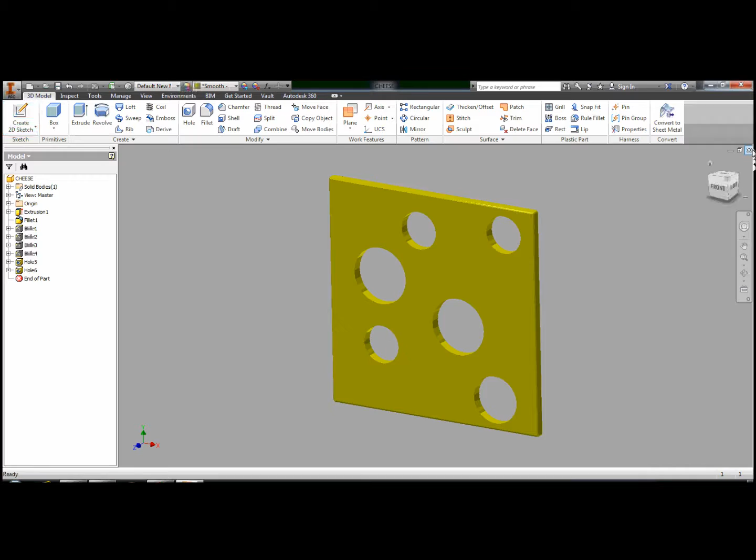So now we're going to go to New, English, Standard IPT like we discussed before, and just hit Create from there. Then, as always, you create a new 2D sketch in the XY plane.

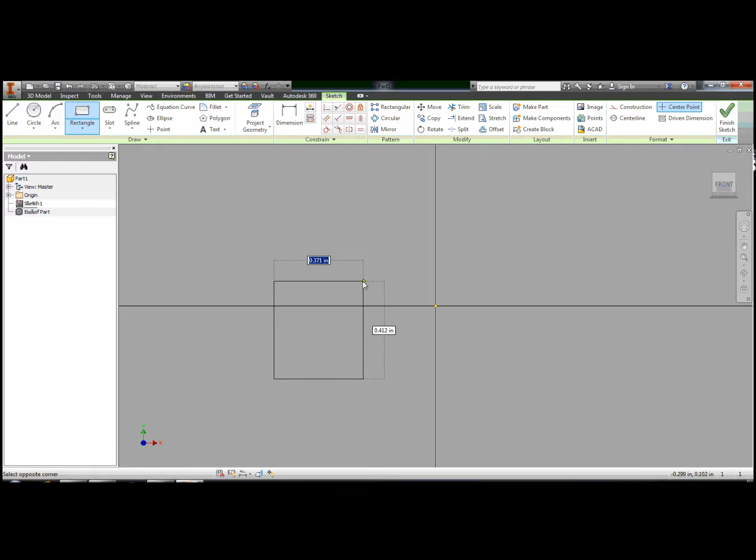Now rather than a circle, we'll make a rectangle, and we'll give it specific dimensions of 12 by 12 inches, because once again this is a huge hamburger. That's a lot of cheese.

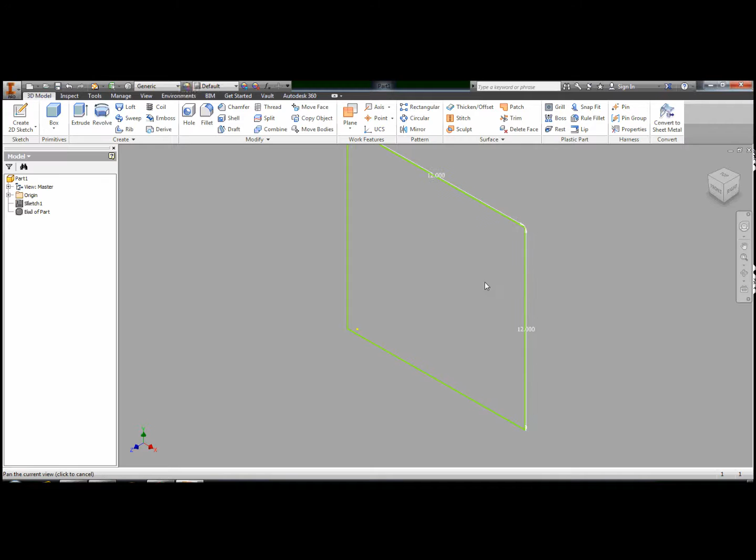As you can see from that rectangle, you can just kind of rotate it, and there you go. We have this finished sketch, and now you're just going to extrude it out 1 inch. You can go any direction with the extrusion, it doesn't really matter.

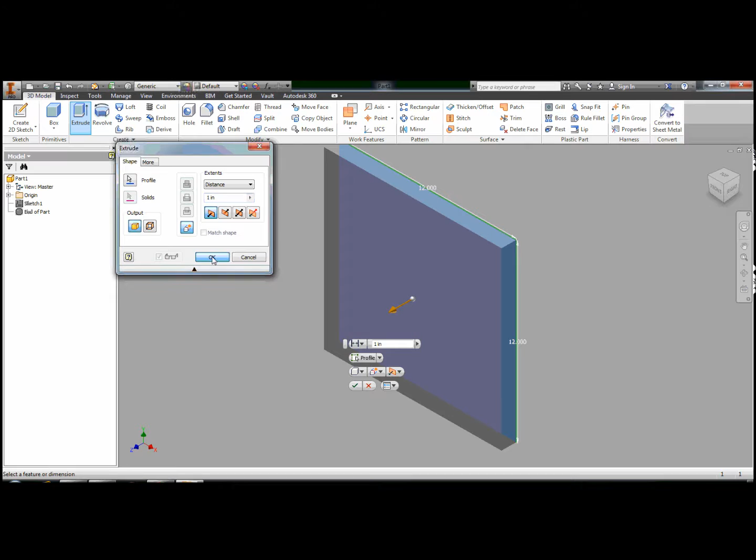And okay, there we go. From the orbit tool, or the home button, you can just rotate it around and make sure it looks good. Usually this is more important with more defined parts other than just a rectangle.

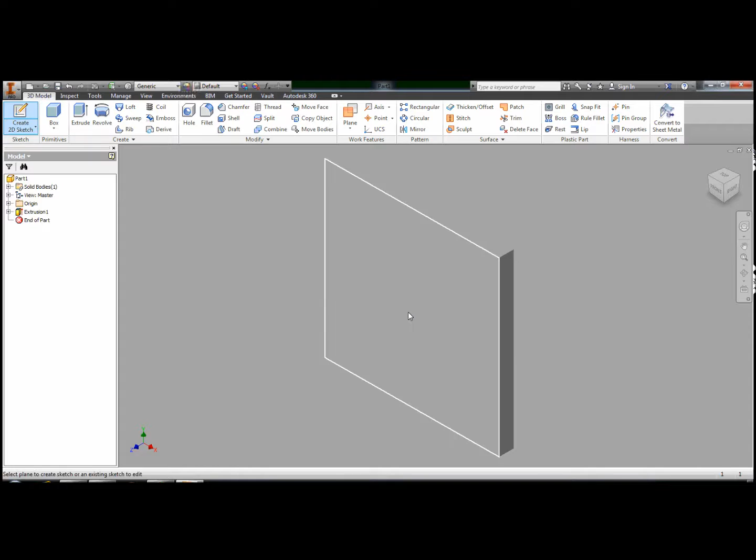One thing I like to show you guys is that in Inventor there are multiple ways to do things. So for this demonstration, we'll show you two ways to make the cheese. The first one is just hitting Create New 2D Sketch and clicking the side of the rectangle.

From there you can just create a bunch of circles, and what this is going to do is we're going to extrude those in and create holes through that. This is probably my preferred way to do it, but honestly the hole tool is pretty easy to use too. I just like this better because you can get easier placement by drawing construction lines.

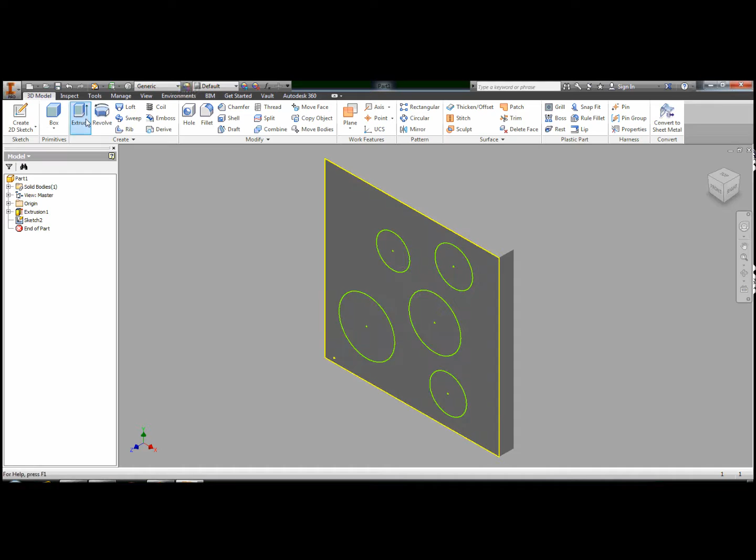From there we'll just hit Finish Sketch, and you'll go to the Extrude tool, and we'll extrude those in.

There you go. This is what you shouldn't do in Inventor, because from each sketch you can only make one extrusion. So if you make multiple circles, you can only extrude one in at a time.

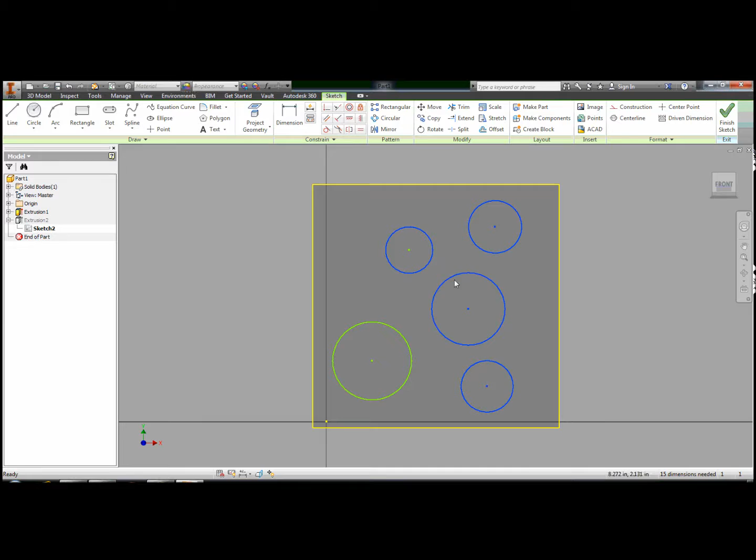So we're going to have to create a new 2D sketch separately and create the circles differently from there. We'll go back to our 2D sketch from the browser bar and delete those.

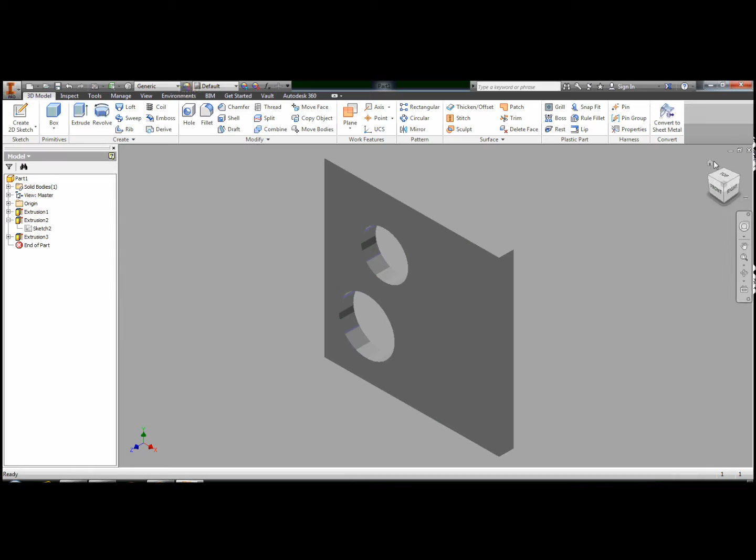Then we're going to create a new 2D sketch from there, and create the new circles. We'll have to extrude each of those in separately, as you can see by my doing so here.

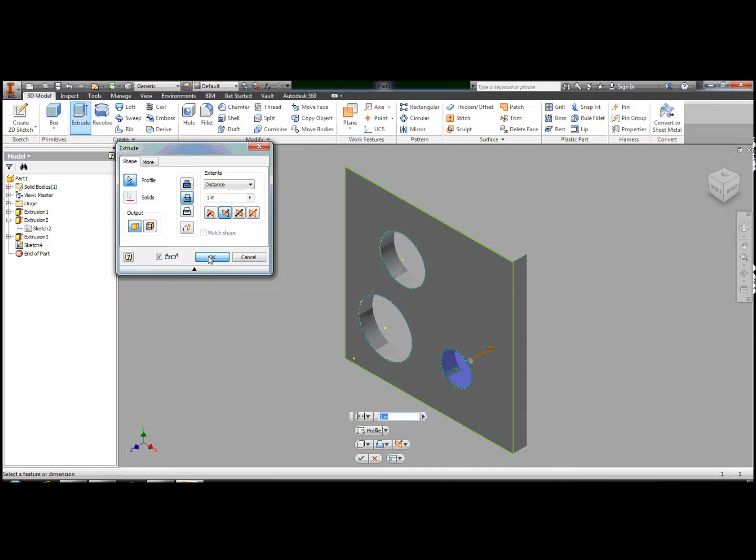Now remember, whenever you're extruding them, to change the direction so that it's extruding in. If you just extrude out, all it'll do is make a bump on your cheese, and that's not what you want. We want holes.

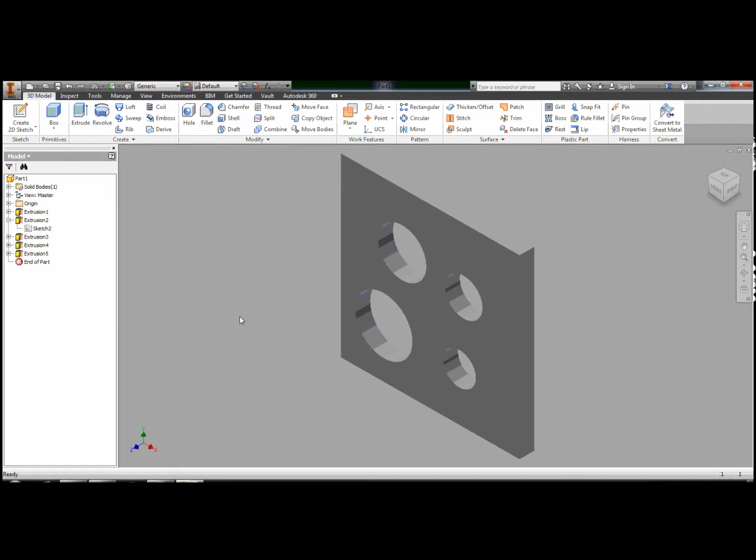One other thing that's important: whenever you're extruding in, make sure your measurements are right, because if you have a distance that won't go all the way through, you won't have the right measurement of hole.

Alright, and from there, that's how you make holes one way. I'll show you the second way after we've individually colored it.

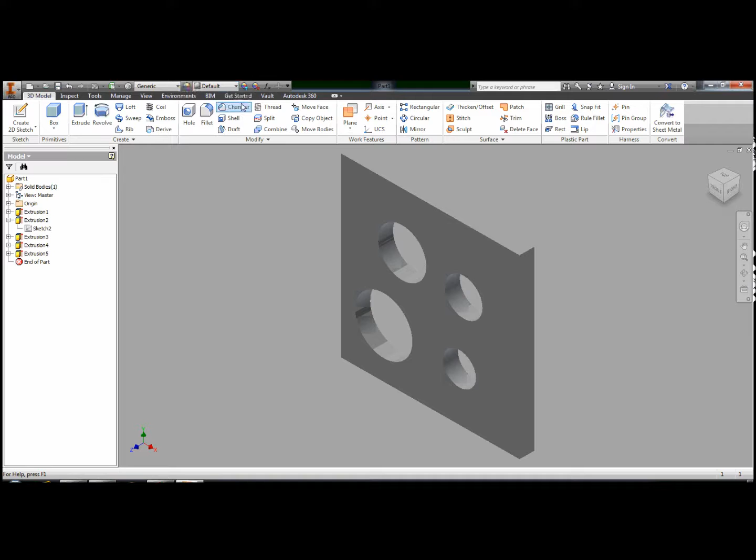How you color it: you can use one of the default settings, but we didn't find any that we really liked for cheese, because they all make it look metallic if you choose a yellow setting, and that's not what we want. We want it to look like cheese. So click the color wheel with the blue triangle under it, and you'll get a nice little color wheel that pops up.

From there, what you're going to do is click whatever face you want to color, as you can see by my doing here, and then select a nice little orange color. It may take me a little bit to find one, hang on.

Alright, just a little darker. Okay, that looks good.

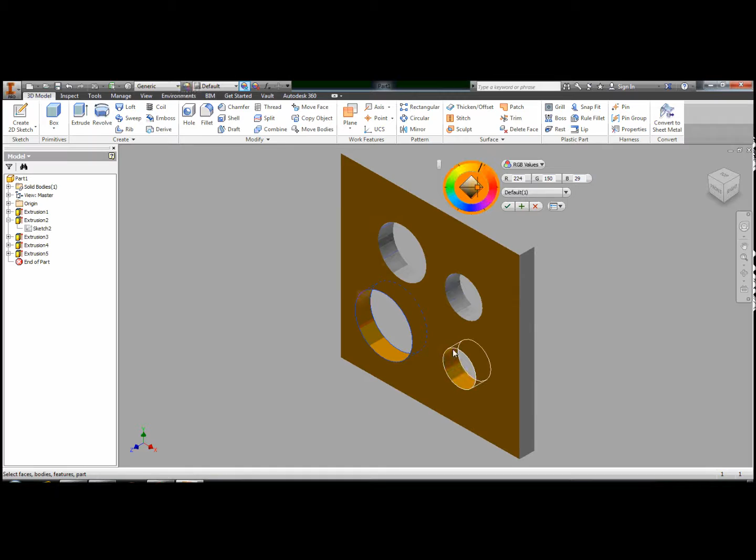Then what we're going to do is click the same button, and if you click that, there you go. It'll give us the same color on all of them.

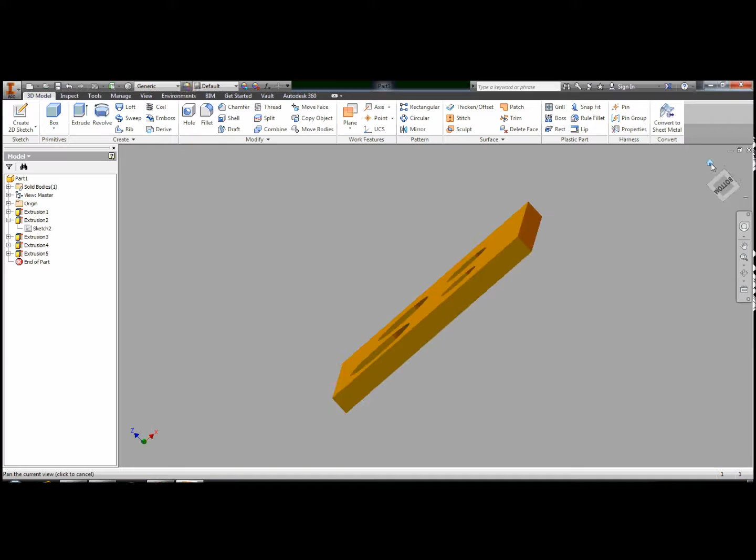So then you can either apply them individually by hitting the plus button, or you can hold Control like I'm doing now. Then you've got to make sure all of your sides are still the same color, so we have to rotate it around with the Orbit tool. And there we go, all sides of the cheese are now colored.

In crisp, stunning 3D.

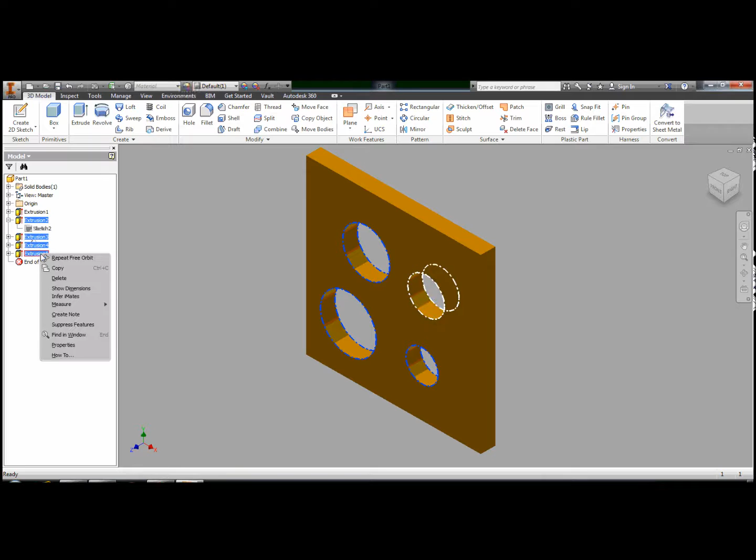Alright, now from here I'm going to show you the second way to create your holes inside the cheese. So what I'm going to do is just delete all these extrusions from the browser bar. You can hold Shift or Control to select them all, or you can delete them all individually. Either one works, it's all the same.

I'm holding Control in this case. Then right click, delete, and just hit OK on that. If you don't want to, you can uncheck the box and your sketches will still be there, although you won't have any use for them in this case, but you never know.

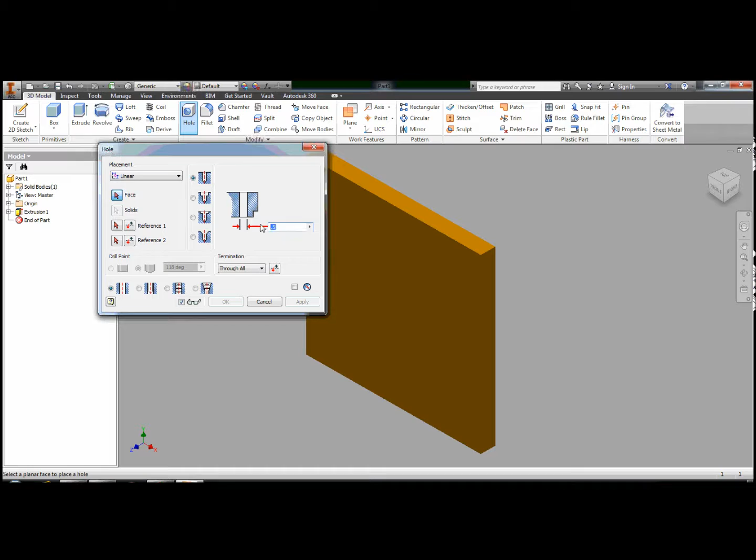From there we're going to select the diameter of 0.5, and that is a tiny hole, so we are going to make it 3 inches actually. You can just click OK. You don't need to change any of the settings besides the hole diameter, which is right there next to that big picture. Then we're going to do that again with all of our other holes.

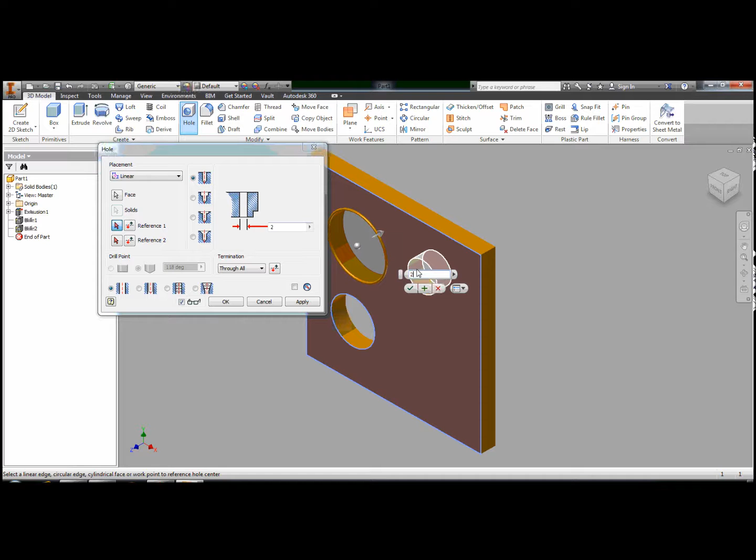The sizes here are just kind of random, just as long as it looks good, it's fine.

If you don't want to leave the dialog box, you can just click Apply, or you can keep reselecting the hole tool, and there we go. We have a finished piece of cheese. Thanks for watching.